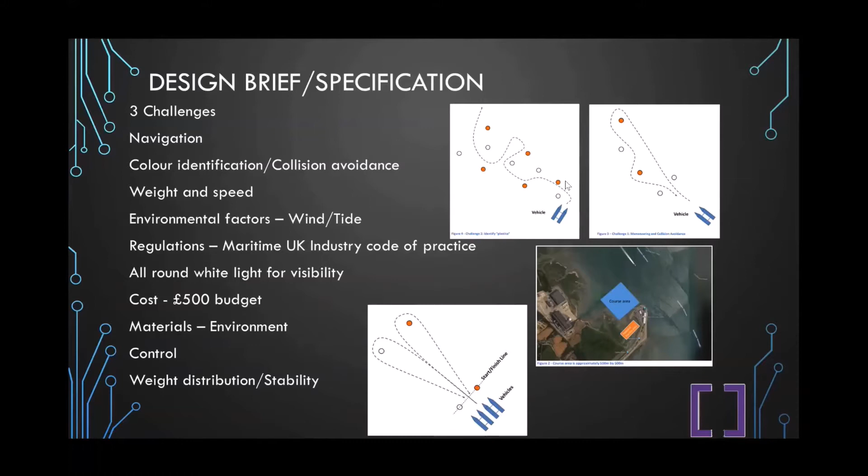For the computing, we had a choice between a Raspberry Pi and an Arduino. The Raspberry Pi is what we chose because it has built-in Wi-Fi, which means it can communicate better with other devices. As well as this, it works better with Python, and the Arduino uses C. Our team, as a whole, has more experience with Python than Arduino.

A Raspberry Pi can also do multiple threading at once. This means it can do multiple processes, so it can quicker and do more calculations at once, meaning it's better suited for data calculation. For data transfer, we had to choose between a 4G dongle, a mobile phone, or radio transmitter.

We chose the 4G dongle because the mobile phone would take up too much of our data, and the radio transmitter would not be able to communicate with other devices as well, for example, our website and anything else we use to communicate with the drone.

For location, we had to choose between a GPS chip with a gyro compass and a mobile phone. The GPS chip with gyro compass would have everything we needed, be able to tell direction and where it is, and would not take as much of a budget as the mobile phone would.

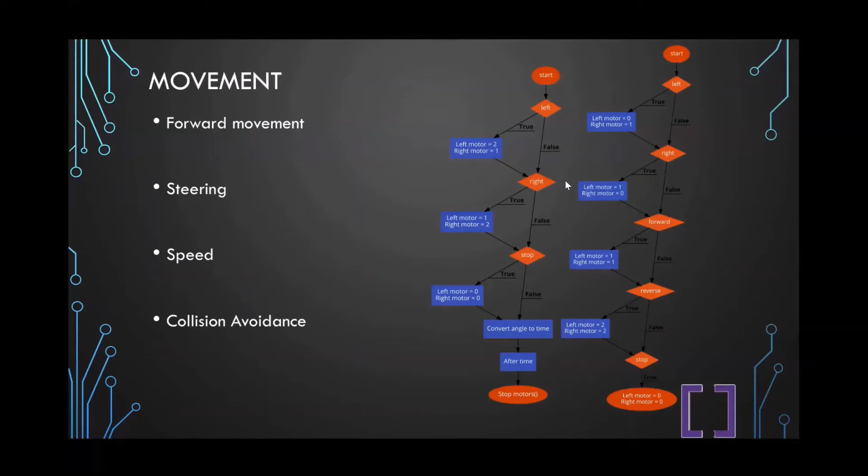Colour detection would be done by the Raspberry Pi. It would have a camera mounted on the phone which takes a snapshot. This photo will be analysed by a Python program which will find the colour at the centre of the frame and use an algorithm to detect the colour and select it from a database.

This would work well with contrasting colours, and it would have a select few colours in the algorithm which it would be able to detect from. So if there are any colours similar to anything else around, it would have better detection because it would already be looking for those specific colours.

I'll pass you back to Joe for navigation.

So for navigation, we have to plan our route before. We begin by typing in the required GPS coordinates to create checkpoints for the direction of travel into the user interface.

So then the initial route is planned. The current location is compared with the destination, and this happens throughout the whole voyage the vessel is taken on. The distance to the next checkpoint can be calculated using the current location.

Pythagoras' theorem is used, and the required bearing is calculated and the new heading is obtained. The vessel will alter course if required, while constantly analysing the bearing and distance to the checkpoint. The code will cease when the vessel is within a radius of the checkpoint. Visual sensors are used to locate the buoy.

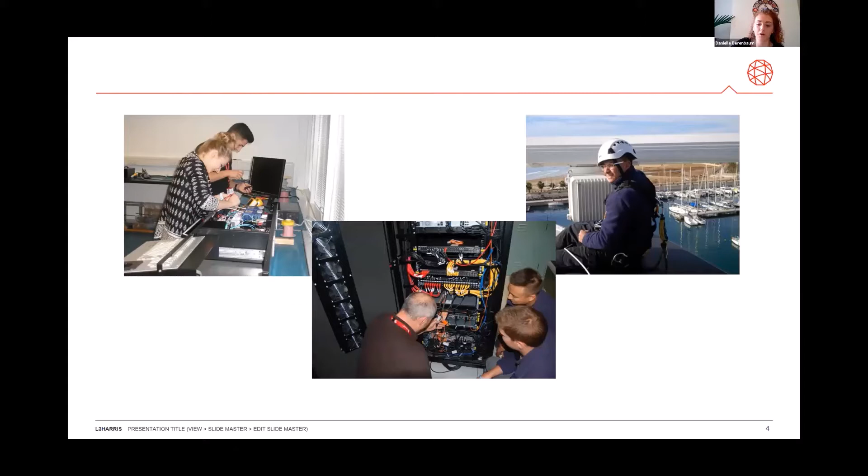So once I finished my scheme, I got a role as a systems design engineer, which was for me the perfect combination of the engineering, research and development side of things with the customer-facing, faster-paced work which I had experienced within the bids and proposals team.

I still carried on with various different events, like in that picture there, the Young Engineers events on HMS Sultan, which were really good. I further honed my skills in technical proposal writing - I wrote a technical paper which I presented at the International Naval Engineering Conference in Glasgow in 2018, which was terrifying, but a really useful experience, and I'm really grateful I got to do that.

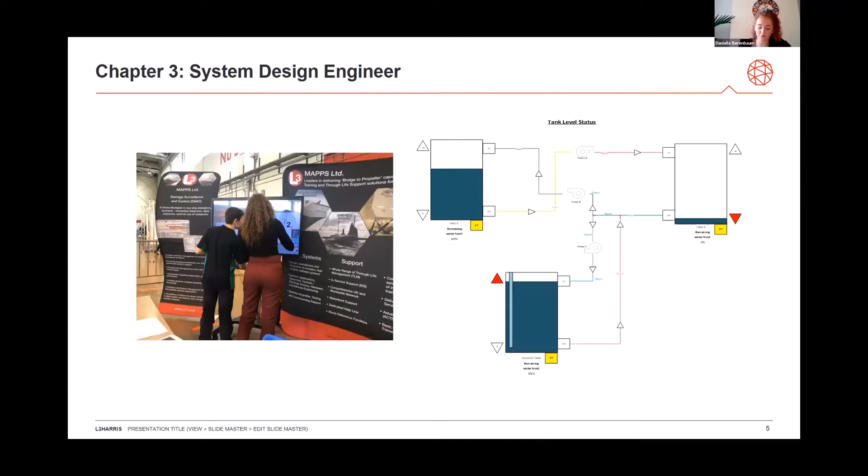As an R&D project, there's always something high priority, always something else that needs doing first. But it was the perfect opportunity to de-risk this potential new solution with a new IO, with WAGO IO systems for projects which we then used for Type 31 IPMS.

So moving over to Type 31, I am currently the systems engineer for our Type 31 project, in which we're providing the IPMS. I was lucky enough to write the technical paper as part of the bids and proposals team, and then of course we won the contract, which was brilliant.

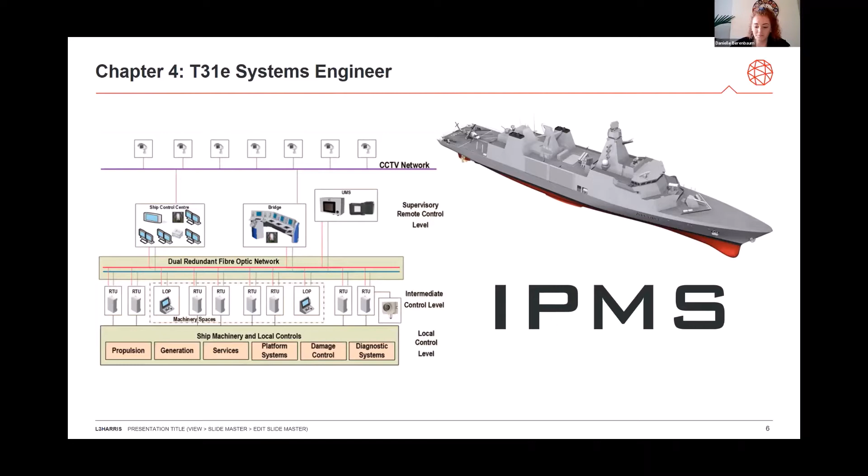So what's next for me, and what's next for L3 MAPPS? As a company, we've worked on QEC, Type 26, and now Type 31, providing IPMS and other extra capabilities. We'll be pushing Type 31 forward for the critical design review in a few months, which I'll continue with my much heavier engineering role, which I really enjoyed. I'm also doing a part-time master's degree with the Marine Technology Education Consortium - an MSc in Marine Engineering.

Personally, I wish I'd done it while I was still at university - it's a lot easier to do it then. Now I've got a full-time job and a part-time degree, which is hard work, but I'm very lucky to have a very supportive company which has allowed me to do it. So that has been really brilliant.

So that concludes my presentation. Might have been a bit quick. I'd like to thank you all for listening again. Hopefully I've given you a little bit of an insight into my journey and my experiences as a graduate and then through into the working world, and whether what you've heard you've loved or you've hated. Hopefully it's given you something to think about, and I look forward to any questions later on. Thank you.

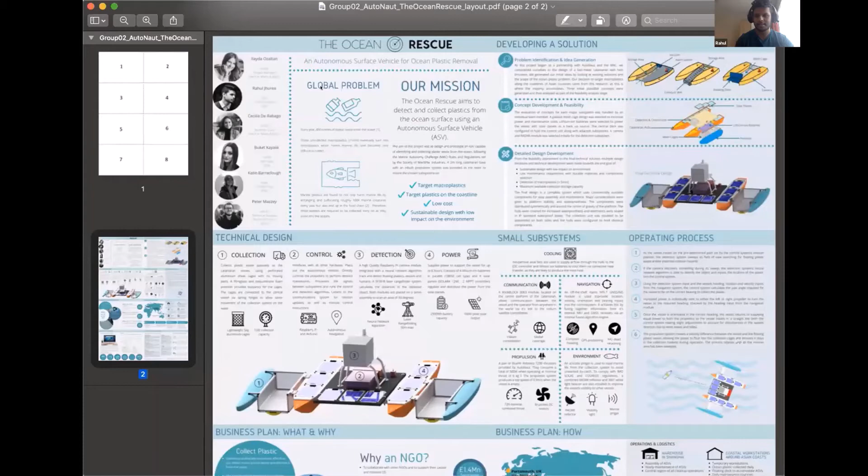So I'll start sharing my screen to show what we've been doing. We have a little poster that we've made. Can everyone see? Okay, so we're a team of 6. I was the technical lead on this project. Katie, who was going to join us, was the design lead - she designed the catamaran, the physical features, the CAD around it. We had 4 others as well: Elida, Buket, Cecilia, and Peter, who were business lead, project management, R&D, all of that.

So when we started with this project, we looked at it holistically. We did a bit of research into how plastic waste accumulates in the ocean, looking at existing companies like the Ocean Cleanup and existing solutions like Waste Shark, comparing how we can do better. We found that one of the big hotspots for plastic accumulation was in East Asian countries like Indonesia and China - millions of tons accumulate every year, far more than in the States, where it's only about 1% of that amount accumulating at the coastline. We also found that the biggest problem was that when plastics would drift out into the coast, they would eventually degrade into microplastics, which are much harder to collect as they sink to the ocean floor, degrading into smaller plastics from UV rays from the sun.

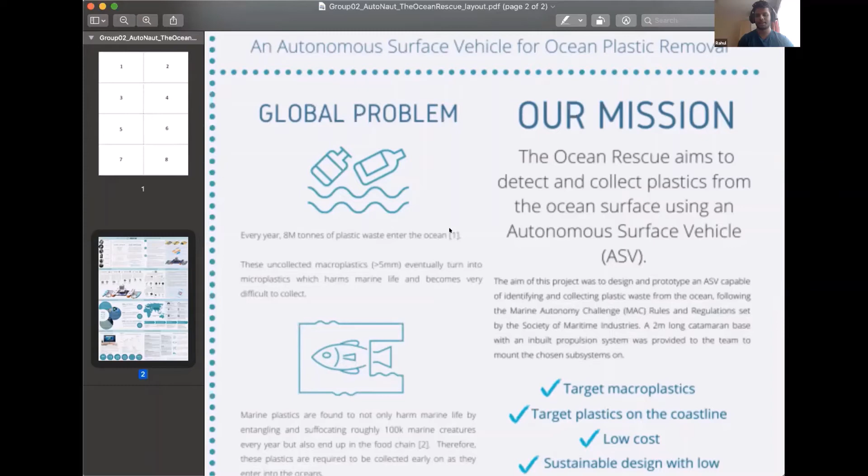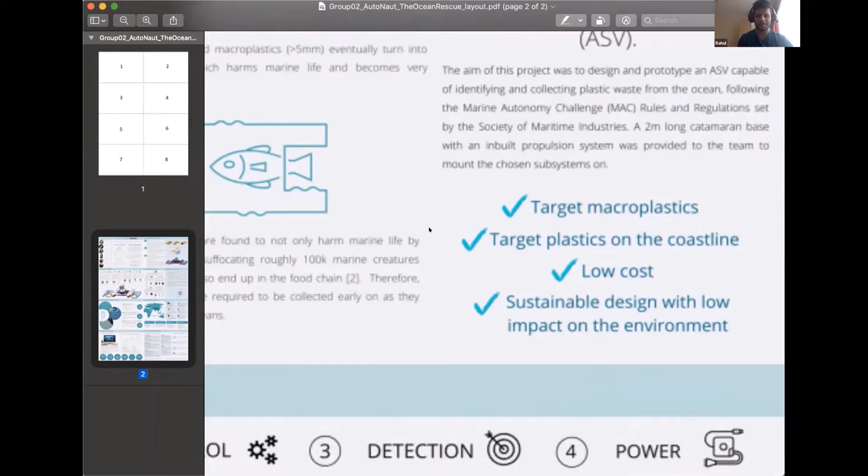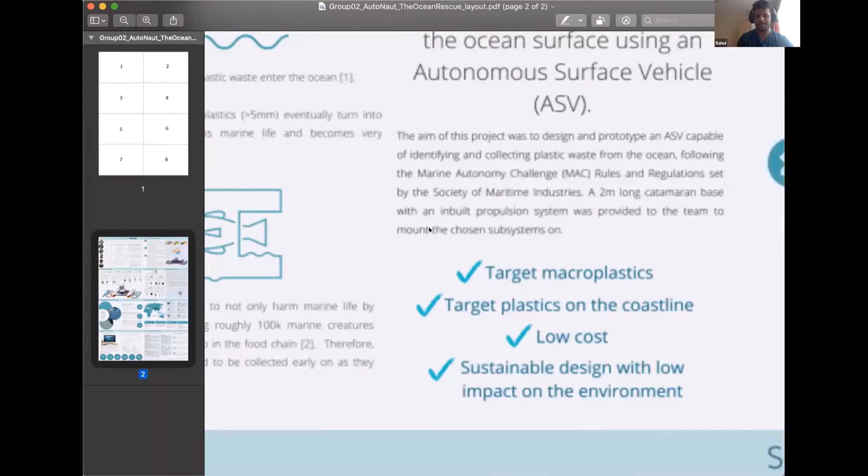So we came up with this specification. We want to target macroplastics, plastic pieces greater than 5 millimeters, like bottles that have just gone out recently - they mostly accumulate on the coastline. Also, because we're targeting regions in East Asia, we wanted to go low cost so we can incentivize them to purchase our technology. And we wanted to go for a sustainable design, because when you're making something like this in such a hazardous environment, it could easily be trashed and you could end up doing more harm than good. So that's something we were mindful of.

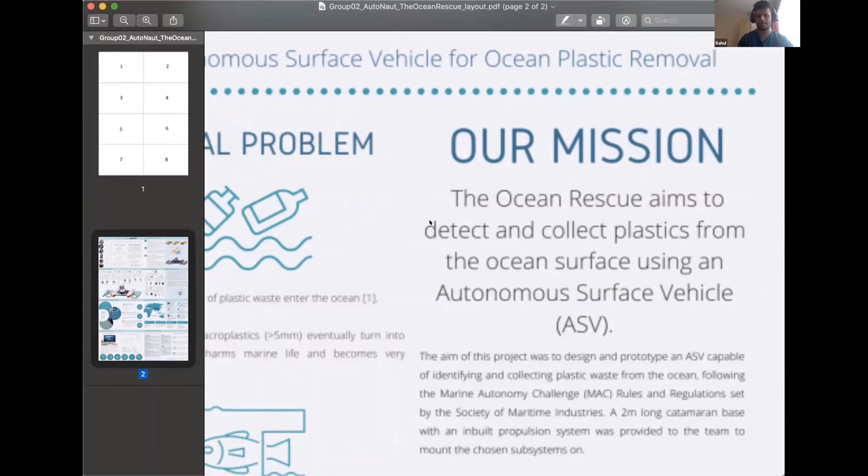Our mission was to detect and collect plastics from the ocean surface using an autonomous surface vehicle. We used as a baseline the vessel from the specification. It was a 2-meter catamaran with twin thrusters, twin Blue Robotics T200 thrusters, and we built on top of that.

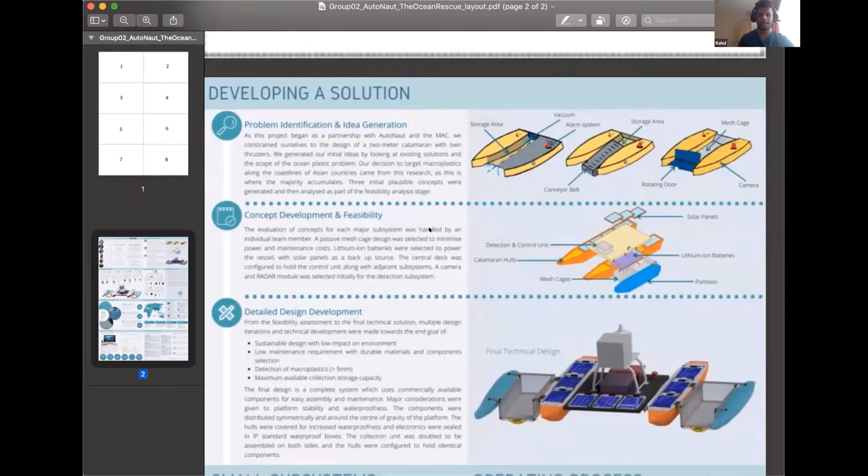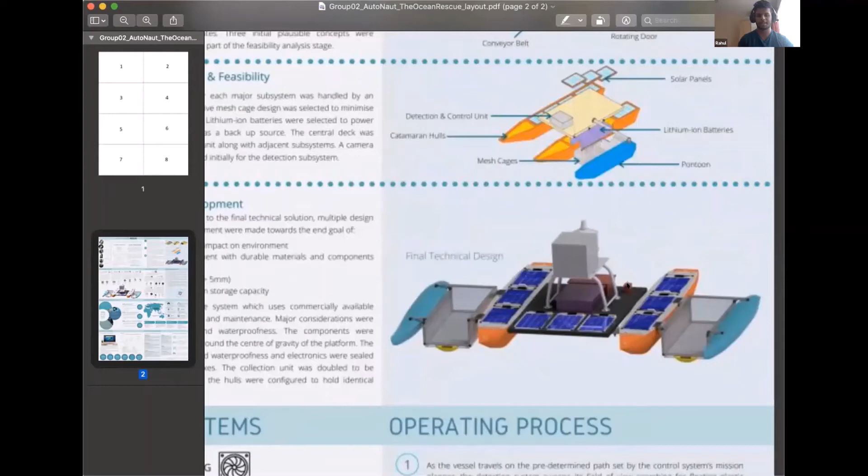So this was our design process. We did a morphological table concept of all of our little functions - control, collection, detection, navigation. We made a morphological chart and a couple of concepts to combine them before we finally came to something looking a bit like this. It deviates a little bit from the specification given by the MAC challenge, but it's pretty similar.

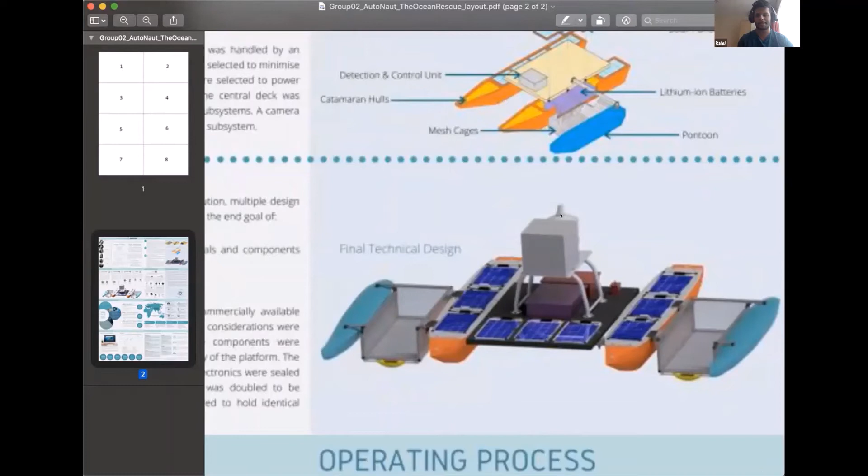In the final design, it's powered by a big lithium-ion battery pack with solar panels as a backup in case it gets stranded. We have collection cages with pontoons for balance. We have a control system with a Raspberry Pi and an Arduino running an AI algorithm. For detection, we have a camera with a neural network algorithm for detecting plastics and obstacles, and a bunch of other modules for navigation, which I'll tell you about soon.

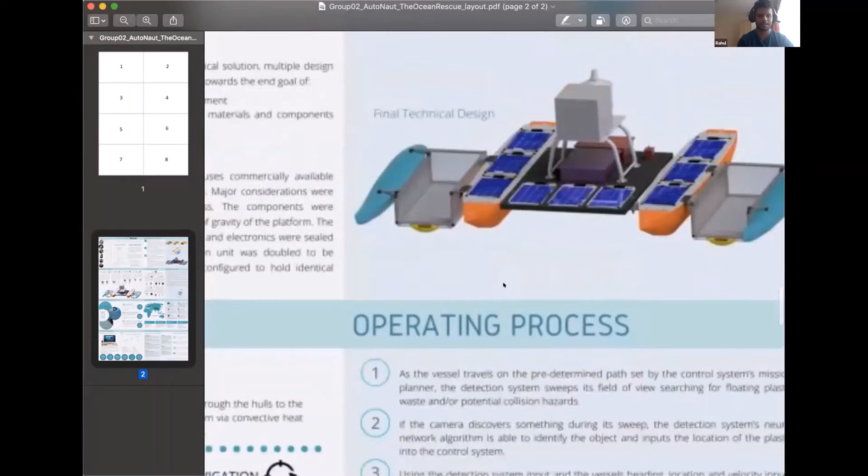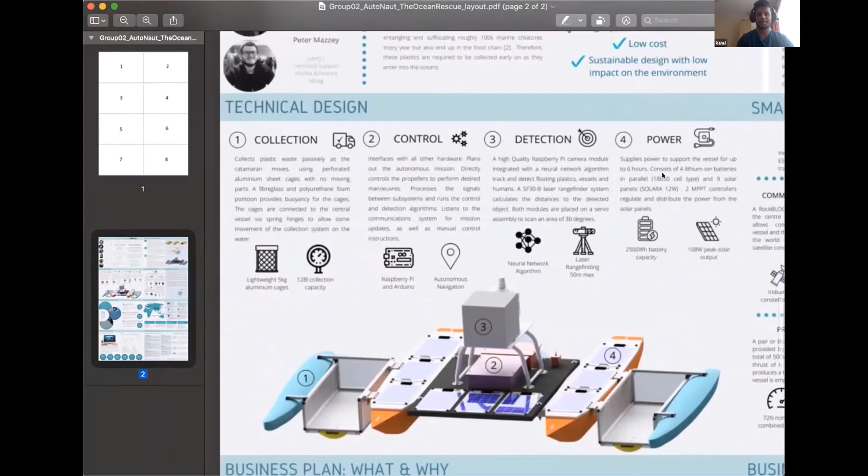The way we broke up this problem was we decided there's 4 major subsystems: collection, control, detection, and power. Each of these 4 was assigned to one of us. For the last 2 of us, one was in charge of integration of subsystems and project management, and the last did these 5 smaller subsystems that didn't require as much work.

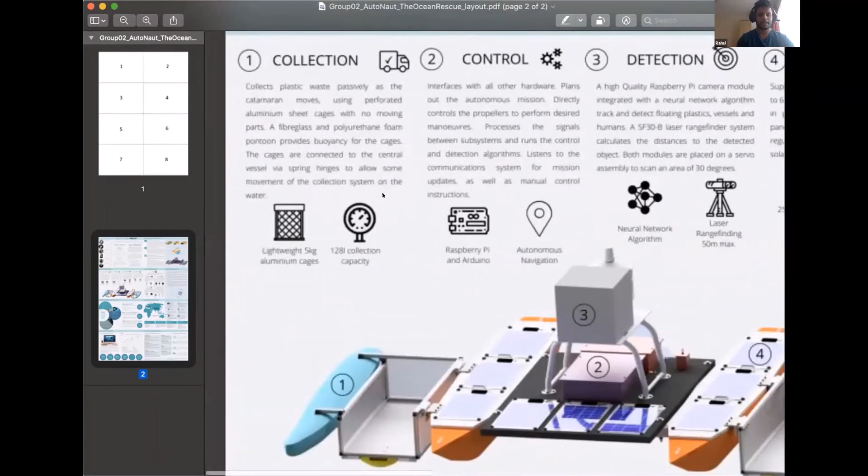For collection, we wanted to go for a passive method. We iterated through a number of ideas, but we went with a passive method - lightweight aluminium cages that passively collect plastic.

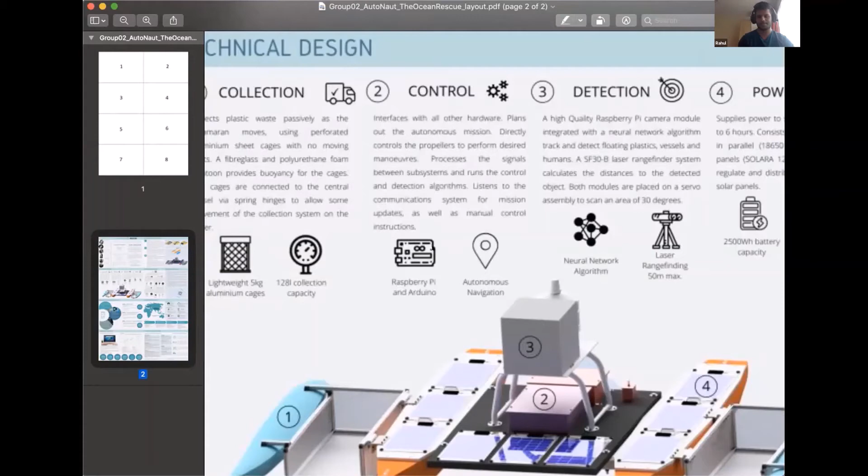For the control system, we have a Raspberry Pi and an Arduino. The Raspberry Pi runs the neural network algorithm for detecting plastics, as well as a mission planner which can alter the course of the vessel as it detects plastics. The Arduino acts as a slave to the Raspberry Pi, so it can interface with some of the modules we have, which communicate via I2C or something.

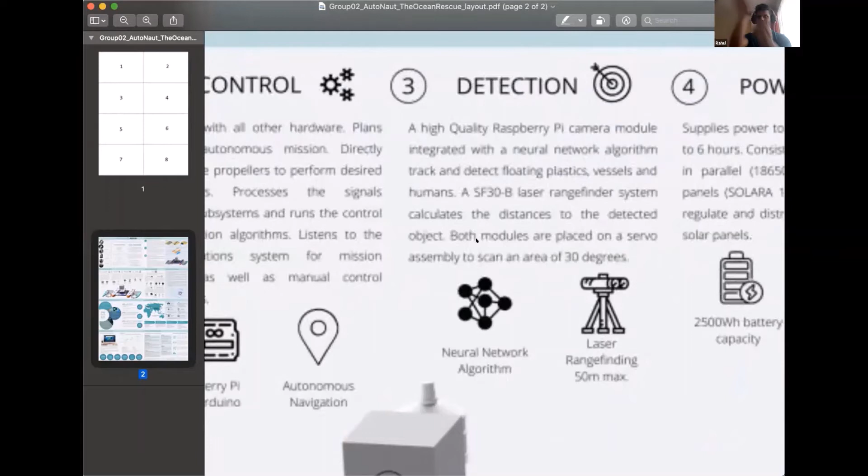For detection, we decided to use a combination of a Raspberry Pi camera with the neural network algorithm and a laser rangefinder for getting a point cloud of distances away from the vessel. For the power system, a lithium-ion battery pack, along with a set of solar panels in case the vessel gets stranded.

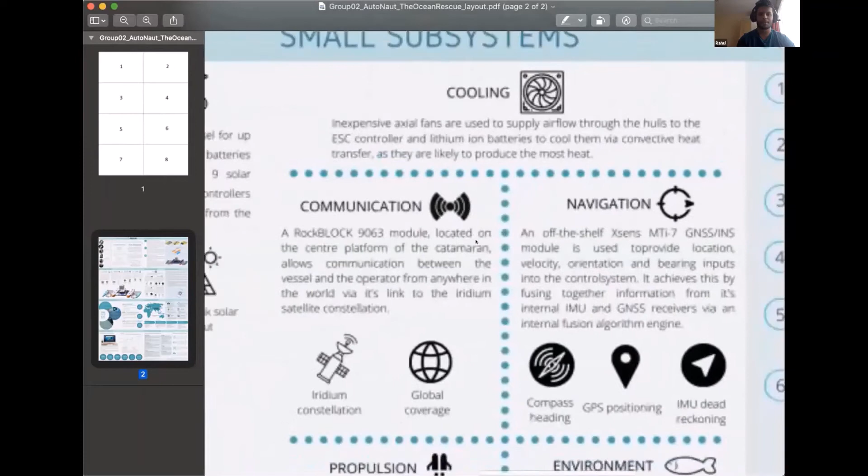For the smaller subsystems, we had cooling, communication, navigation, propulsion, and environmental resistance. For cooling, we just had a fan and a heat sink on the ESC controllers for the thrusters. For communication, we used a module that communicates with the Iridium satellite constellation, because one of the things in our specification was that this has to go up to 12 miles out from the coast.

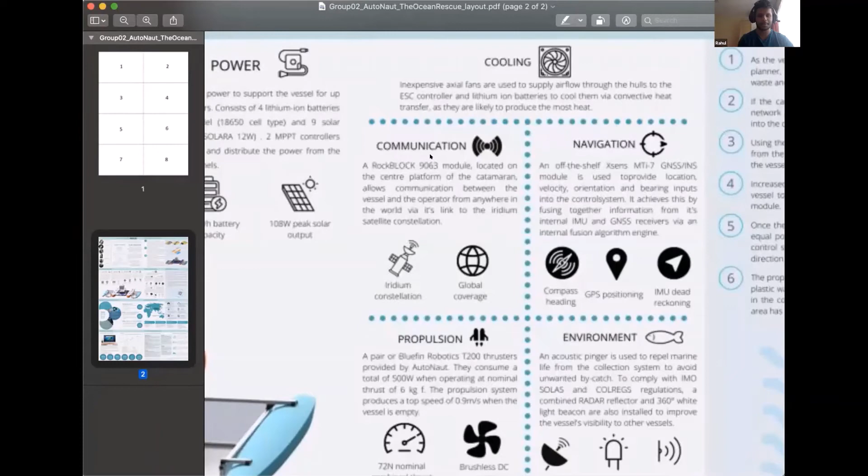That's because 12 miles out is the territorial limit for that country's ocean, and the plastics can drift quite far out as well. So something like radio or cellular wouldn't have been reliable, so we needed satellite communication.

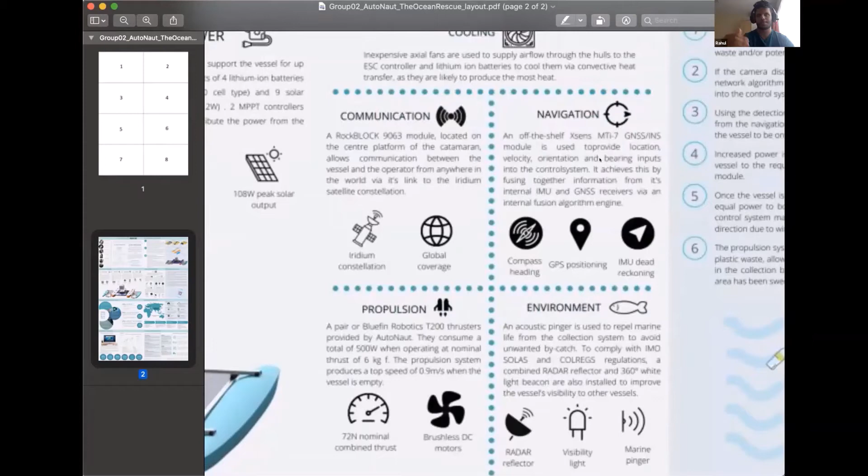For navigation, we wanted to develop our own GNSS-INS fusion module, but it would have taken too much time, so we chose an off-the-shelf module for GPS, combining GPS with also a magnetometer and an accelerometer for dead reckoning. For propulsion, we went with the thrusters provided with the challenge, the twin T200 thrusters, capable of providing up to 500 watts of thrust, or about 72 newtons thrust.

For the environment, we added a radar reflector, a light, and a pinger, just to comply with some maritime regulations.

To sum up how this thing works: someone from a base station will designate an area for one vessel, like a hectare wide. Using some satellite imaging, they'll find an area relatively dense with plastic, and tell the vessel to target this area. Then the autonomous system inside takes over, and it will sweep the area, collecting plastics it finds along the way while avoiding collision with other obstacles. So it's designed to be autonomous within that area that the operator sets, and once it does, it returns to shore and the plastic can be emptied and collected.

And we wrap this whole product around a theoretical business plan. We wanted to be an NGO, doing something similar to what the Ocean Cleanup was doing. They're an NGO who have made an artificial moving barrier that collects plastic in the Great Pacific Garbage Patch. They've had mixed success with it, but they're one of the more well-known solutions.

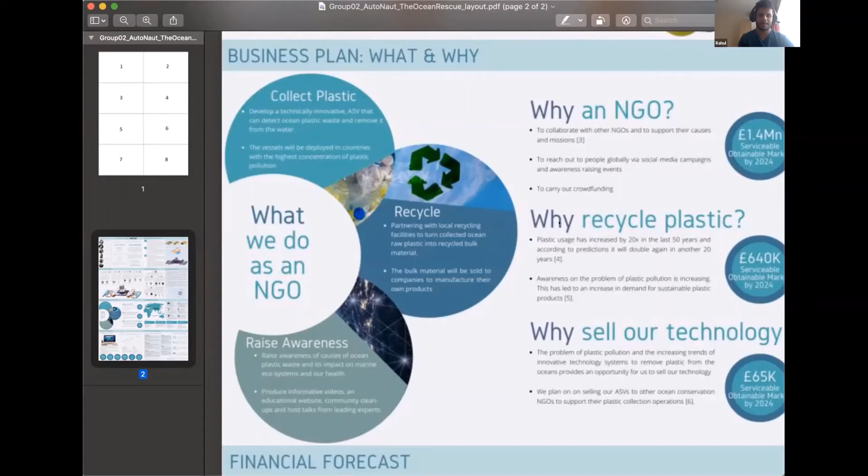So yeah, that's why we want to be an NGO. The plan is we'll prototype this. This is all hypothetical because we didn't have any hardware to work with. The plan would be in the first year or two, we would prototype the ASV in Portsmouth, around where Autonaut is, and develop it to a reasonable level. Then we'd start our initial cleanups in China, and over the next couple of years, we'd try and roll out over Indonesia and the Philippines and other countries that prominently have this problem.

So for financing this project, we'd do a bit of crowdfunding. We've been a little optimistic with how we fund it, but it's a similar model to how other organizations are trying to tackle this problem, so we think it could work.

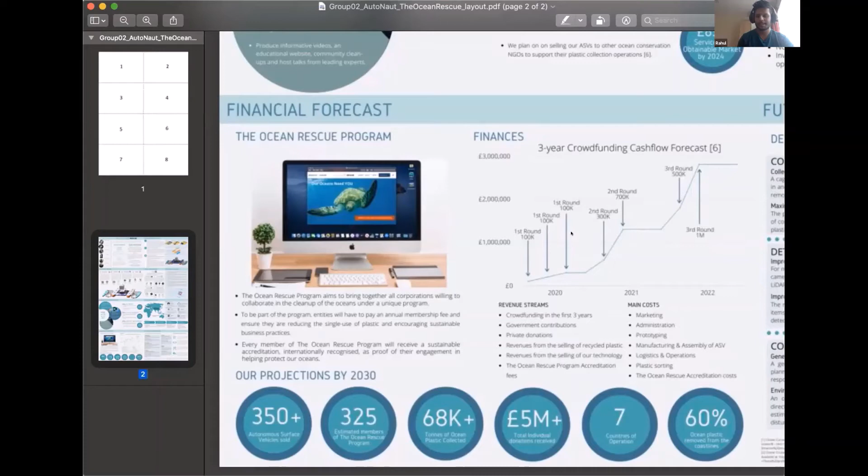And finally, again, because we didn't have access to real hardware, and because a lot of this is very hypothetical, we did some simulations. We did a lot of white paper research, but you can't really say this is good for sure. You can only go so far in how detailed you can get some aspects of the design done without eliminating uncertainty.

So we had a lot of future considerations, and a few of them were included. We want to account for weather disturbances in our control system, maybe use a wave propulsion system. It would be a lot more efficient, but it might not work in some areas of East Asia where tide is always really low. And also use just generally better detection hardware. That sums up our project.

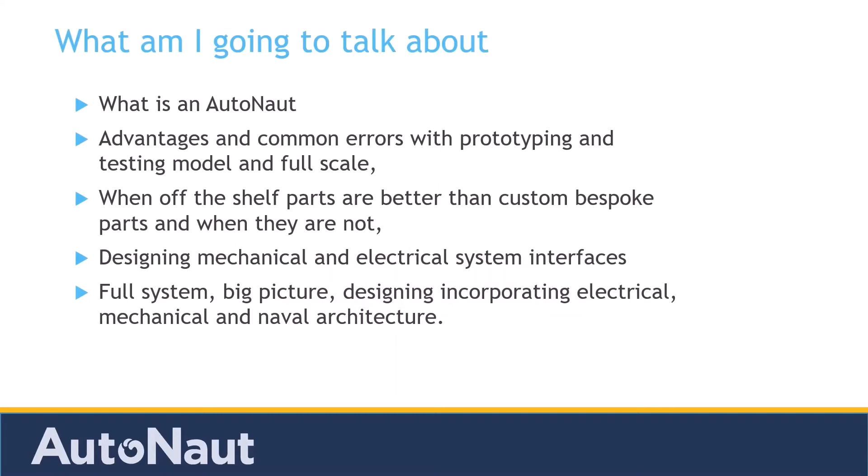So firstly, I'm going to explain what an Autonaut is, for those who don't know. Then I'm going to look at advantages and common errors in testing programs, and the advantages to prototyping, model testing, and full-scale testing. I'll have a look at the difference between when to use off-the-shelf parts and when custom bespoke parts are better. Also have a quick look at the mechanical and electrical system interfaces, and a brief skim over the sort of full-scale, big picture designing of systems which you need to incorporate electrical, mechanical, and naval architecture.

So firstly, Autonaut is an unmanned surface vessel which is wave propelled and solar powered. The wave propulsion works by the waves rocking the hull and moving underwater wings, allowing the boat to swim forward without using any fuel. And the solar panels on top power the electrical systems on board, which include the autopilot system, onboard auxiliary systems like the nav light, the radar reflector, as well as the onboard payload, which can be a range of sensors capable of collecting different data samples, depending on what the mission capability is. Because it doesn't use any fuel, but none on board, it's both capable of very long endurance missions, and able to collect a whole range of different data, depending on what sort of sensor payload you mount on the boat.

It's easy to launch, so you can launch it from a slipway or from a crane. And from a crane it could be off a dockside or out at sea off a ship. The boat's not fast, only going a couple of knots most of the time, and is able to stay on station if you want to by just circling around a waypoint. But the system has to be very robust to survive any sort of storms or any other sea state that you can see.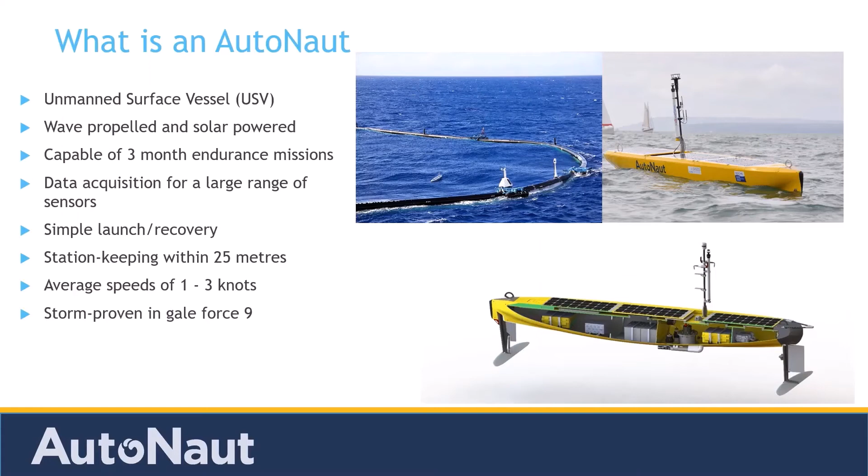It's a good idea to try and do some real-time analysis as you go along to assess how the performance is going, to try and identify any interesting areas. Any analysis you can do during the testing to understand the performance is very helpful.

When designing the testing matrix for all the tests you want to perform, it's important to look at comparative tests - tests that are side by side pretty much exactly the same. You're only changing a single variable, so you can have a better understanding of how that variable impacts the performance of the testing. This allows you to be more targeted with your testing matrix to identify and understand the areas you're looking at to achieve your goal.

It's also important to understand the limitations of your testing. This will have big implications on which areas you want to concentrate on, and which areas you don't.

While you're doing the testing, it's really important to write down notes and use as many pictures and videos as you can. This will help when you come to analyzing the data, giving a better understanding of what definitely went ahead, to confirm and back up your memory of what happened for more detailed analysis later on.

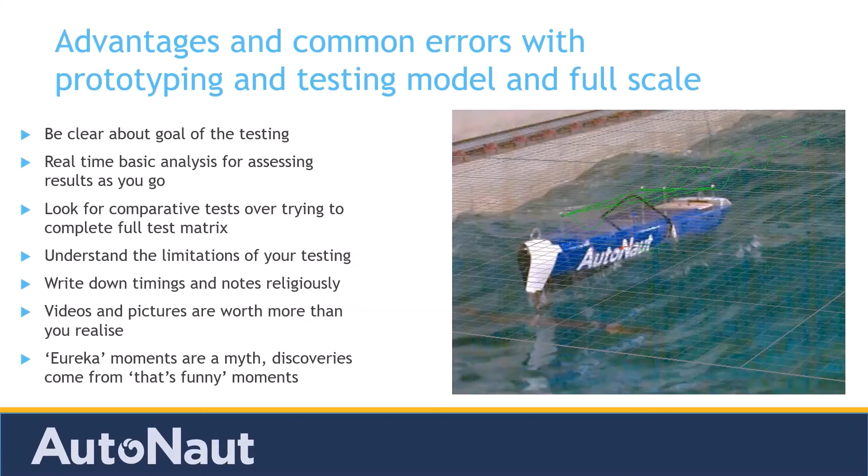In testing, eureka moments don't really happen, but you more or less find a funny moment where you discover something interesting in the data, which you have to go through and confirm is what happened - that's where the interesting discoveries come from in the data sets. So it's important to have as much opportunity to do that as possible.

The advantages and differences between full-scale prototype testing and model testing come back to knowing the limitations. Full scale gives you much more direct results of the direct components, but it might not be as cost effective, and you might not be able to do it in a controlled environment, meaning you can't control enough of the variables to make it accurate testing.

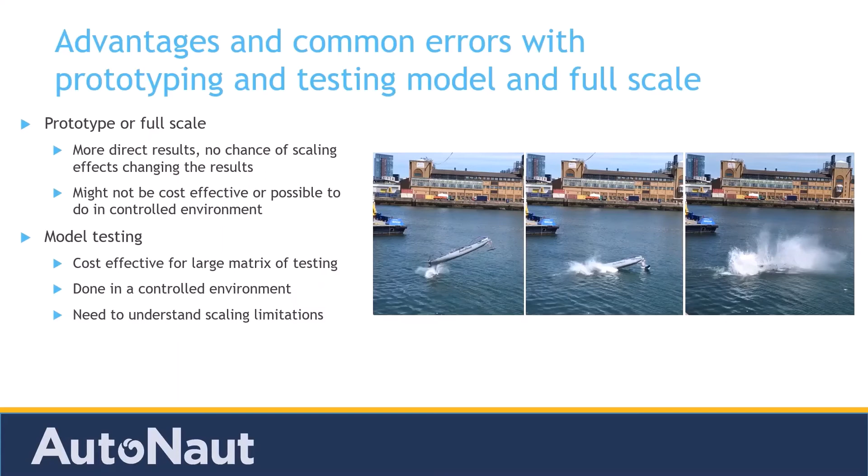Whereas model testing you can do much more cost effectively for a large matrix, and in a much more controlled environment, but you need to understand what the limitations of the scaling effects are likely to be, and how that impacts the testing program and how much value you can get out of it.

There are times where off-the-shelf parts will be better, and other times where you'll need to design and build your own custom parts. For off-the-shelf parts, you've got the advantages of economies of scale - lots of parts for multiple users, sold much cheaper, and designed, built, and tested by another company, so they will have those overheads.

But the issues with off-the-shelf parts are you don't have control of the quality, and you don't have control of the availability. They might not always be available to the standard that you want, or numbers might not be available.

For functionality, they might have different priorities for what's important to them, especially with developing the system, so you don't have as much sway over that side of things. If you need more control, you need to be more in control.

Then designing a custom part is better, because you get to design and build it yourself. You get full control of the quality, availability, and functionality. But you'll be producing smaller numbers of those parts in most cases, so you won't necessarily get the same economies of scale.

You also need to review what your team's skill set is, about whether you have the capabilities to design that part to the level that you require. So it's important to have a good understanding of your team's capabilities.

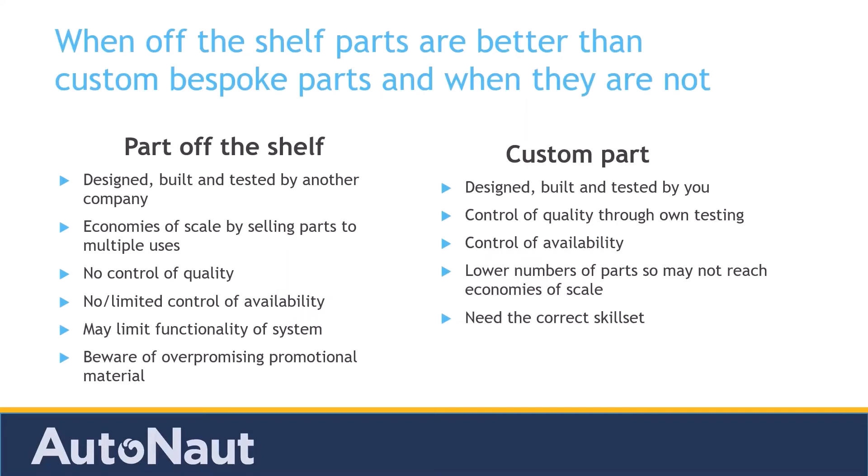When it comes to your teams, you're likely to have a split between mechanical and electrical systems, and the interfaces between these parts and the interdisciplinary communication are all very important to get a good part going forward. So it's important to define the interfaces early on, because these will have quite large implications on designing each part or each of the components.

For the designs that will be successful, you want to allow for a level of evolution from both sides, because this will allow you to get understanding, learning from either testing or missions, so you can improve the quality and move things further forward.

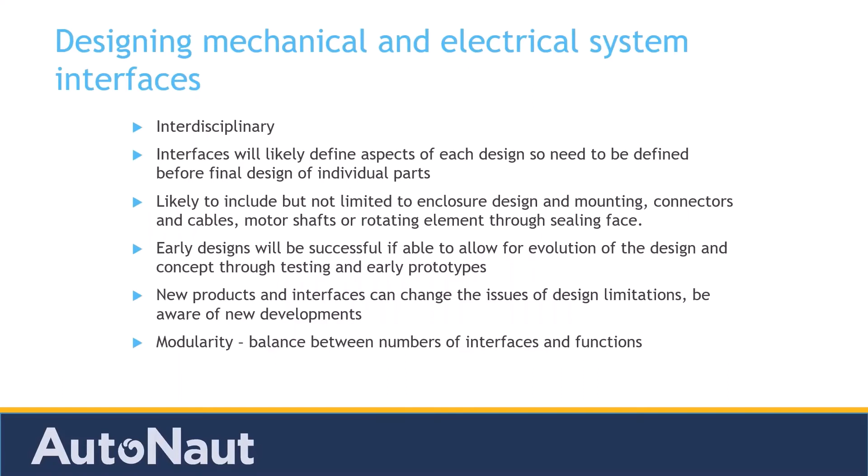A level of modularity can allow different systems to be changed out, switched up and upgraded, which can be very useful. But you also want to make sure you're not overcomplicating the system by forcing modularity into places, which adds more complication and chances of making the product more complex. So a few ideas there of things to look out for.

When it comes to doing full system design, the design spiral is the classic view of it. It's important to keep that in mind when you review the process. You want to start off with the concept, then go out from it with operational requirements and how you understand it. It's important within your team to understand who's responsible for each part, and have some level of accountability for each component to make sure things are working forwards and being used.

The key, especially when designing complex systems like this, is to make sure you learn from everything you're doing to make it better going forward, and try to improve the language you communicate in. It's very easy to not understand the different languages between teams—I'm not talking about English and French here, I'm talking about shorthand, engineering terms about electrical components, interfaces, serial connections, mechanical details. So it's key to make sure you're communicating evenly and fairly in a team, so you can be more productive, and look at what tools you've got available to do that.